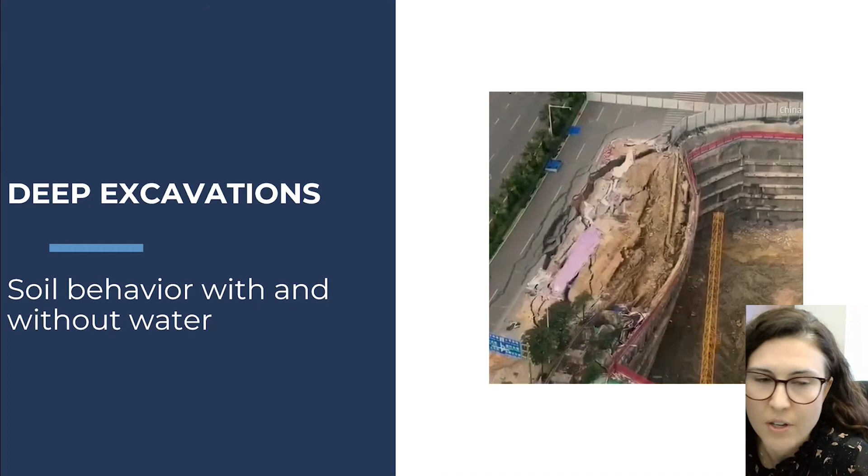It could be dealing with a slope stability problem, where we determine where the loose material is. This could be waste material that is retaining, or any kind of other slope stability problem that's not a natural slope, which could also be governed by some soft material.

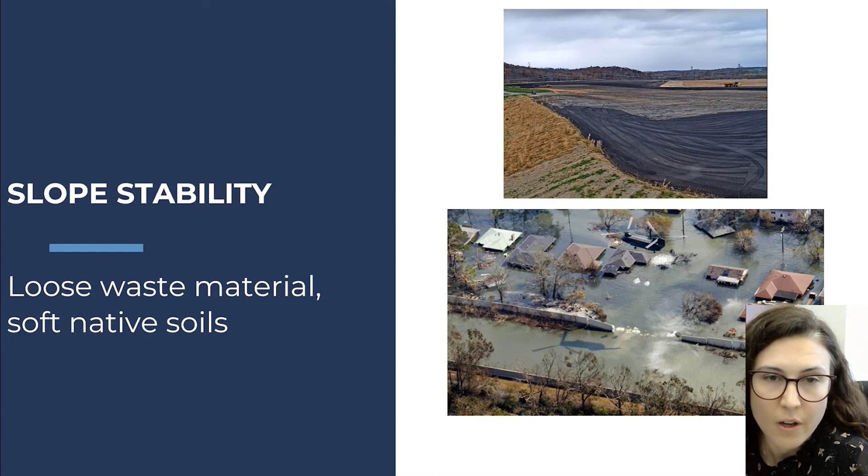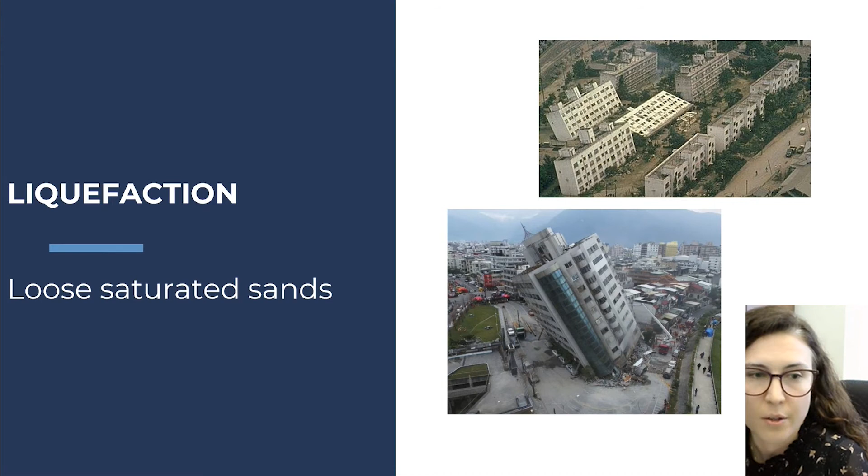We could be dealing with a liquefaction problem during earthquakes, where loose saturated sands - not only sands, I should say sand-like soils, so silts or any kind of waste material that are non-plastic - are susceptible to liquefaction. So we could be dealing with materials like that as well, trying to solve liquefaction problems.

With that introduction, I want to outline what I'm going to talk about today. I'll give a brief introduction on what I think are key considerations in preparing subsurface investigation - we won't cover all fields - and I'll touch on some field investigations, not all, and some laboratory investigation, and mostly the site characterization combining these two, what to look for, and some examples from case studies. We'll finish up with the key takeaways.

With that, let me give a brief intro about what I think are some key considerations in determining the subsurface characterization planning for a subsurface investigation.

Of course, the goal of the project - like we touched on in the beginning - what's the problem? Are you assessing a situation, or are you designing for a certain project with unique loading conditions or unique materials? You know unique materials exist as part of your project. Your project goal is most important, because are we doing a seismic assessment, a static assessment - that will all play into the project goal.

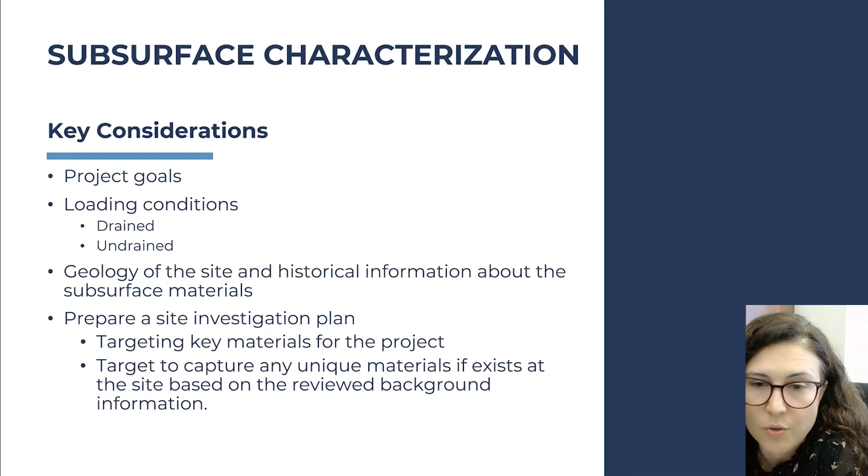With that, you prepare your investigation targeting these materials, which I call key materials for that particular project. And if you want to capture a unique behavior - if you think a unique material is going to govern the assessment - then you target those to be sampled and interpreted.

Let's start with some of the field investigations that could come into play here. I'm not going to touch on every single lab or field investigation, but I've highlighted some that I'll include in this presentation: drilling and sampling, as we typically do, and standard penetration tests. I'll touch these two together, since drilling and the standard penetration test go hand in hand. Then cone penetration tests, which are more widespread these days because of their value in interpreting soil behaviors, and some geophysical tests that give us stiffness parameters for the materials, which can be crucial if you're dealing with a seismic assessment. The purpose of all this investigation, field and lab, is to understand how these soils behave and assign the right engineering parameters for your assessments, designs, or numerical modeling, and any tool you'll use to further understand the soil's behavior.

I'll keep this part brief, just setting the stage for later examples. What I'll talk about here is what the standard penetration test is. It's one of the most widely used field tests we have. Using a standard hammer, dropping it from a standard height, we look at the penetration and collect the number of blows for a certain depth. You're seeing a sketch here, prepared by Paul Mayne, showing how the drop and penetration is measured. This is typically shown in meters, but what we record is penetration in 6-inch increments, typically to 18 inches, and can go up to 24 inches depending on the project.

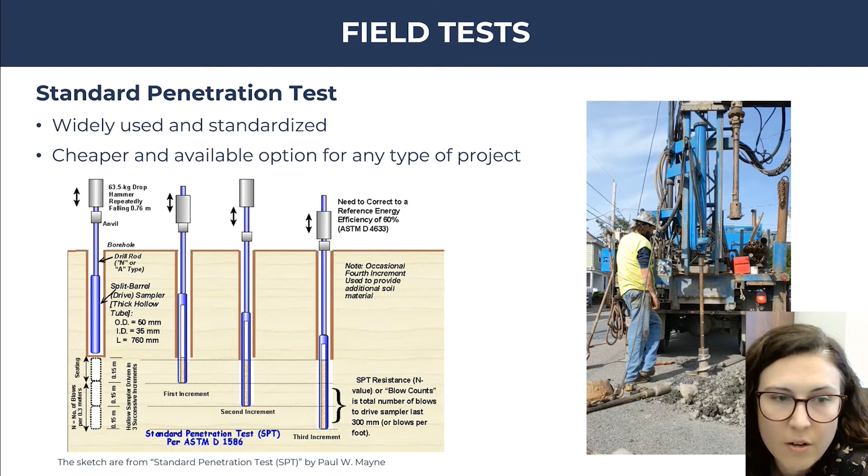We have the chance of sampling it, and also getting an understanding of its density through the number of blow counts. The SPT N values are what the number of blow counts are called. But what's very key to the standard penetration test is the calibration of the hammer, which needs to be standardized, and the energy transfer ratio, which is one of the most important corrections for this field data. It needs to be done properly, because it has a real impact on the number of blow counts collected.

This energy transfer ratio should be maintained and obtained on each rig at least once every 12 months. This is one of the most important aspects of SPT blow counts, which will later be used to interpret many soil parameters. One drawback of SPT is that you need enough distance between the two blow count collections, which can cause interruptions and lead to missing strata information. But at the end of the day, SPT N values are typically used, collected in a boring log, and usually give you a good starting understanding of what you're dealing with.

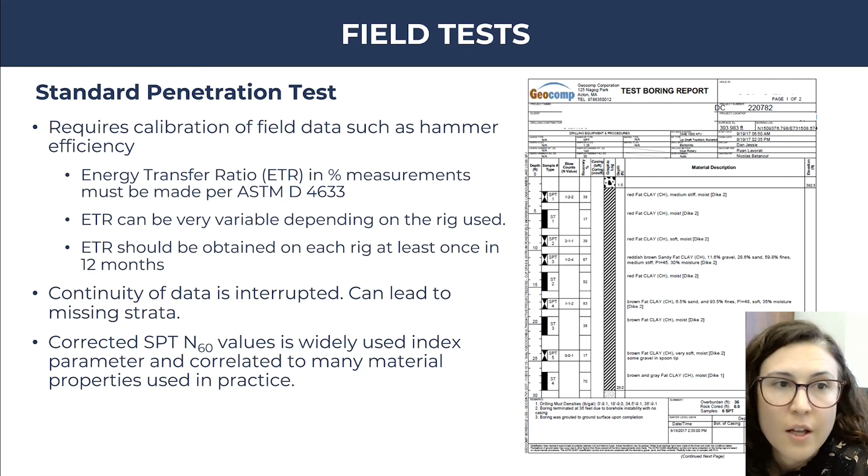Drilling activities also give you the opportunity to do sampling. Split spoon sampling is most widely used to get disturbed material, but it allows you to get the material visually and classify it. You're seeing a split spoon with some bottom ash material here on the left.

You can also use thin-walled samples, which are attempting to get so-called undisturbed samples, but relatively minimally disturbed samples, where you can use Shelby tubes or a piston sampler, which one of them you're seeing on the right here. These help you to collect the critical materials that you're trying to characterize.

Having a borehole, you can use the opportunity to install instruments to understand the water behavior, and you can also install other instruments if your project calls for it, and if you think the monitoring is crucial to your project.

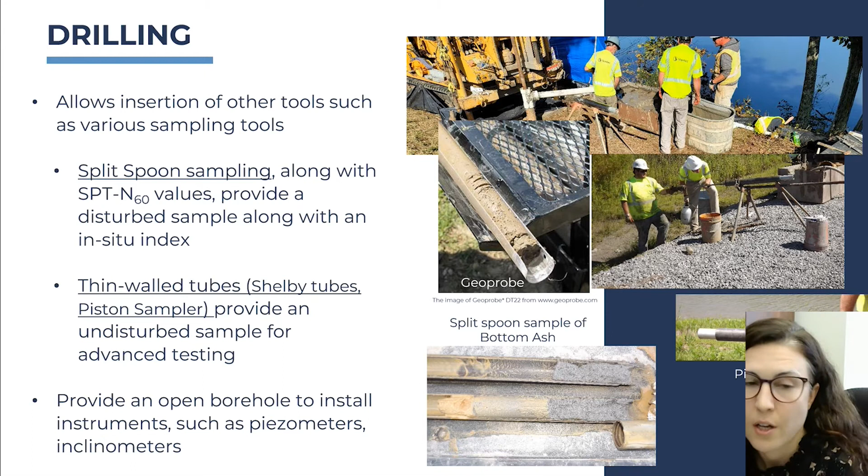With that, I'm just going to touch on cone penetration test, where cone penetration test has been much more widely used recently, more widespread than before, because it's relatively fast and provides good quality data as a profile. So it's more of a continuous profile of data, which is different than the SPT data.

You can add modules to this testing. Typically what it does is with the tip resistance and the sleeve resistance, you have an understanding of the behavior - that's very typical to a cone. But you can also add pore pressure measurements, and you can also add shear wave velocity measurements, where you can understand the stiffness properties or the density of your material, which could be very important depending on the project needs.

But I find the most important value of this testing is the continuous data, which tells you about the variability within certain soil layers.

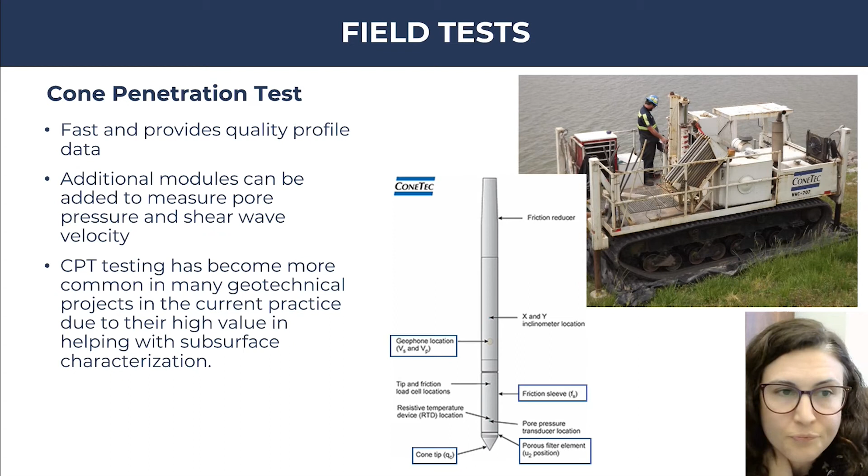Yes, the CPT push rate matters. You could use the standard rate, or depending on the material type that you're dealing with or the loading conditions that you want to create, you can choose to do a different rate, but it gives an idea about how permeable the layers are, how it's going to behave, if pore pressures are going to build up, and what type of pore pressure behavior is dominating.

You can also measure the shear wave velocity, like here on the right. This draft CPT data is available with vendors these days - you can quickly get this draft data at the field, and it could be very beneficial to take a quick look at it to get a general idea of the delineation between the soil layers.

That's why, which I'll tie in a few slides, doing a companion CPT with a boring can be very helpful. If you're trying to make an efficient number of borings and number of CPTs for your project, you can use the benefit of the draft data to plan your sampling and your split spoon and SPT work. I'll touch on this in a few slides down with the value of the combination of the two tests.

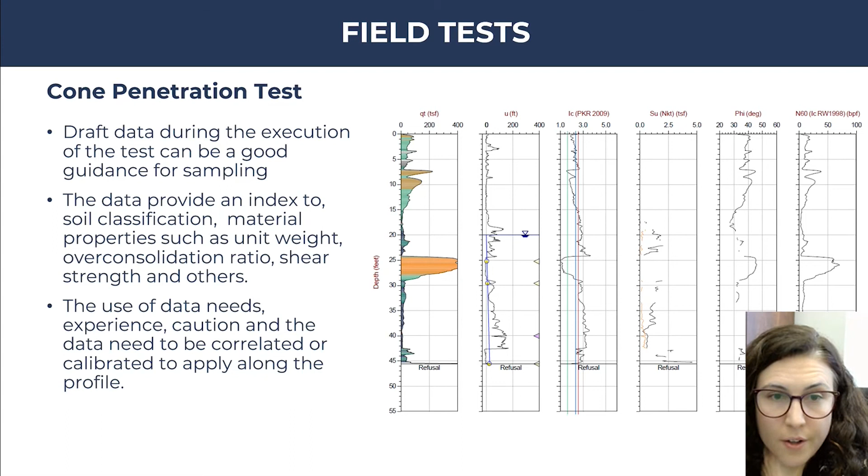Some geophysical tests I want to touch on: shear wave velocity measurements, seismic wave measurements are important. They give an understanding of, especially in the area of liquefaction, or if you're dealing with a seismic assessment where you need the site response. The small strain shear modulus, if it's part of the material properties that you're looking for, measuring shear wave velocity is key. Not only that, it can also help with the delineation of some of these soft layers that you're looking for.

There are many ways of doing it these days, with two major differences: one is active seismic, and the other is passive seismic. Active seismic is more common, most widely known as MASW, cross-hole seismic, or downhole seismic, where you can measure the shear wave velocity.

And passive seismic, mostly this is more of a newer technology where you can use the ambient vibrations to calculate these differences in shear wave velocity. The benefit of that is it has the luxury of giving you a 2D scan.

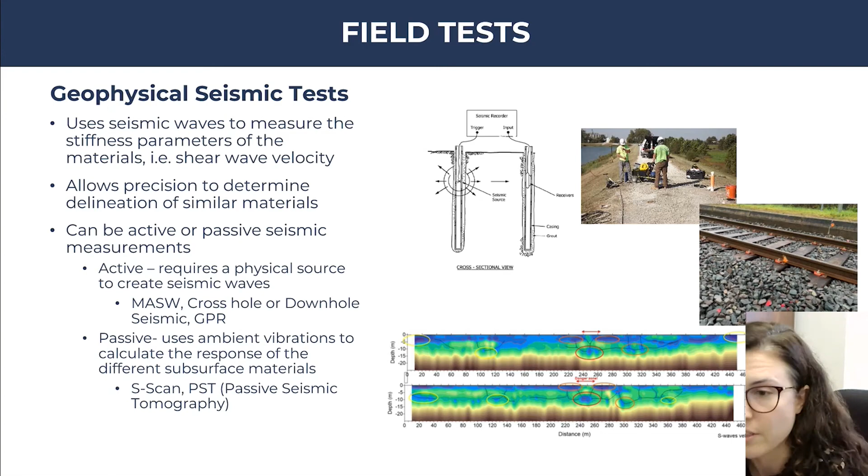So one of the examples of a good practice is with drilling. As we all know, SPT N values are very widely used and correlated to many parameters that we use in our models and in our practice. So the drilling activity can have some impact on the collected data.

And we already talked about the hammer efficiency, that could really affect - not knowing the true efficiency of your hammer and not correcting for that properly can have a big impact on the SPT blow counts that are collected. Not only that, I also want to touch here on the drilling techniques quickly.

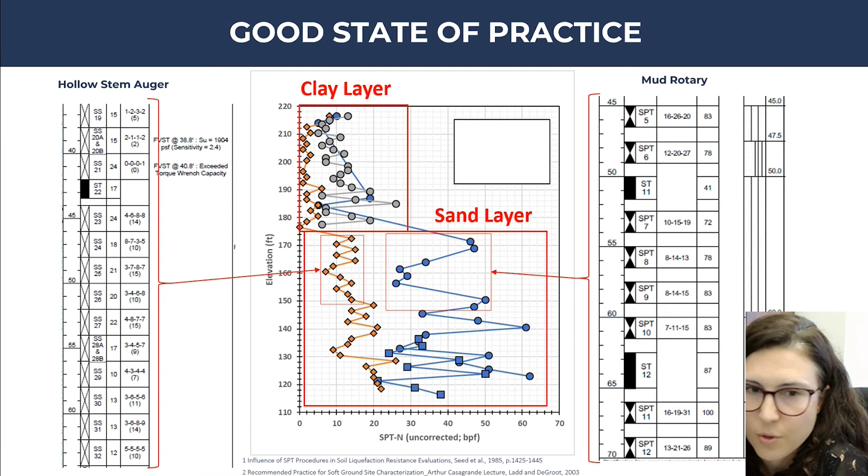So that's one striking example that I wanted to share, which could be in your control, that you can request when you're planning for your subsurface investigation. The other one that I touched a little bit earlier is doing a companion CPT and SPT tests and drilling.

This is a good one because, as I said, SPT and drilling give you the chance of collecting materials and collecting more data. But CPT is a good indicator of what you're dealing with in terms of changing layers, and the pore pressure behavior can tell you about where you can really sample materials, because most of the materials that are good for sampling will have a different pore pressure response.

And if you go and do your drilling right next to your CPT, which is a good practice to do, then you will have a chance of programming your drilling activities where you want to do the SPT test and where you want to do the tube sampling.

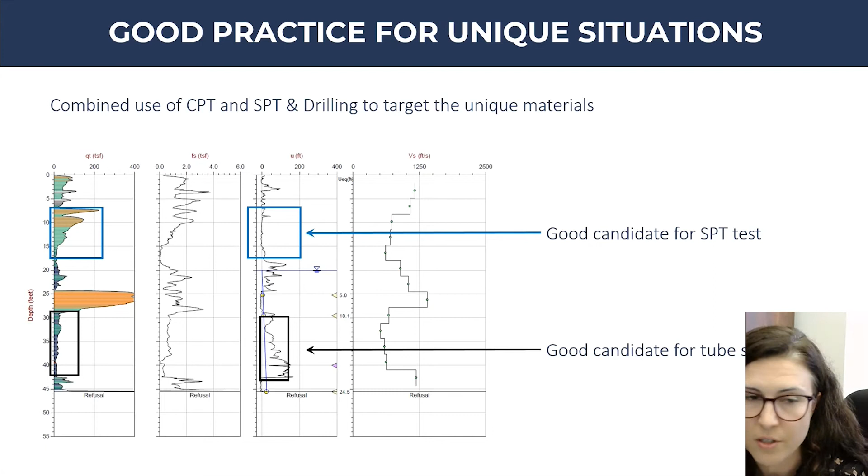At the end of the day, when you're down to really coming up with parameters, you have more information and more kind of information to compare against to get a better picture of the materials. Again, I'm not going to talk about every single lab testing, but I just want to touch on the ones that I typically use.

I kind of separated them into four headings, calling them classification, where I mean most of the classification tests that are typically done as part of geotechnical projects if lab testing is involved. I'm going to touch on these quickly. I want to really stress the importance of X-rays of the tube samples, which can help you select your testing for preparing for material properties.

Consolidation testing is very important too. Again, it's not only for settlement type analysis, though that's kind of the go-to use. Understanding the maximum past pressure of a material, understanding the stress history of a material, can be very important.

And strength testing is very widely done. We do direct shear or triaxial testing for friction angles, and direct simple shear and cyclic simple shear. So I'm going to quickly give an example of these. I'll be brief, and then I'll do some good practice examples in the following slides.

And then the final one, before I forget, is stiffness, I call it, but it's basically modulus and damping by resonant column. I know not every project has this—it's kind of an advanced test and hard to interpret. But if the project calls for it, like if you have a seismic assessment looking for amplification of a site, especially amplification of a slope, where your earth retaining material is the structure, that could be very important. So depending on the project, the need for these advanced tests is valid, and their value cannot be overstated.

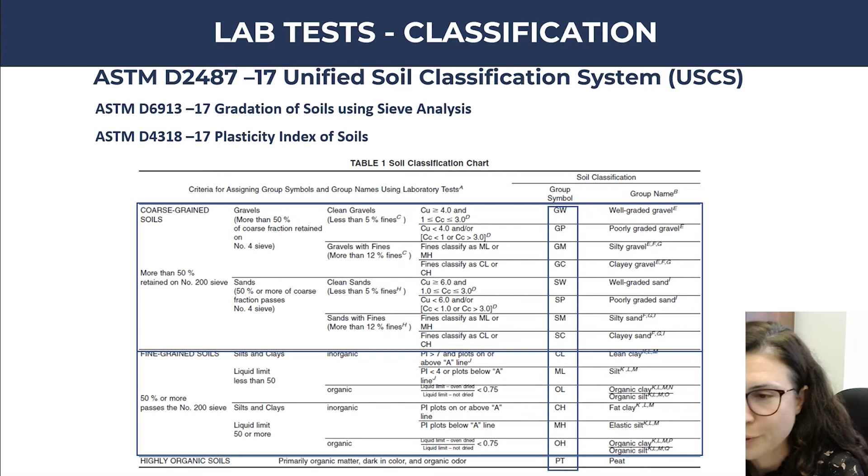All right, I want to stress not only the USCS, the typical classification—I wanted to mention specific gravity, especially if you're dealing with unique materials, like waste materials, mine tailings, or coal ash. They have a very different specific gravity than typical soils. Typical soils are 2.6 to 2.7, but these materials can be different—as low as 2, or high—depending on their chemical and mineral content.

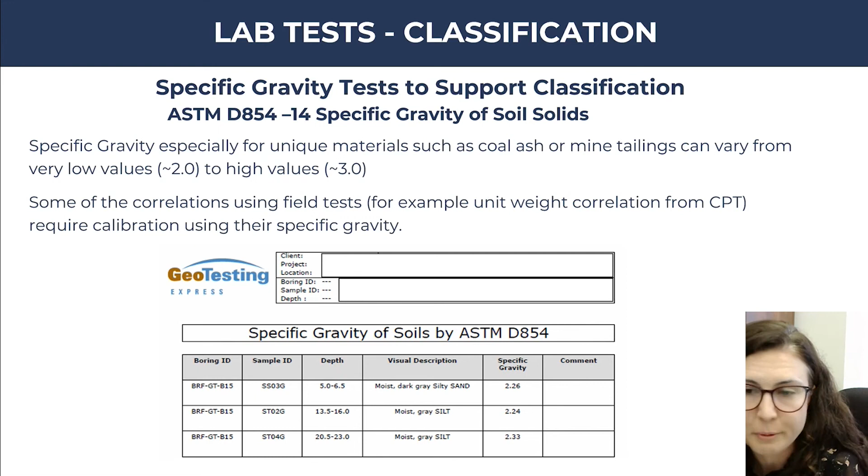Now, last but not least, for sure, is the X-rays of the tube samples that you're collecting. It is important, and if you're dealing with sensitive materials, and if you know that sample disturbance is always there, and if you're going to rely on your lab testing, it's very important to really know what the tubes are.

Sample disturbance has a lot of different tiers to it. Sampling, basically mud rotary, was one of them—making sure the drilling mud is on top, making sure the drilling mud density is controlled so that you collect good samples. That's the first step, but you have to transport them properly, then extrude them properly, and then you have the stress changes.

So there's multiple tiers to this, and controlling some of these tiers can lead to good lab data that you can work with—at least if you want to believe in the lab data. This is important.

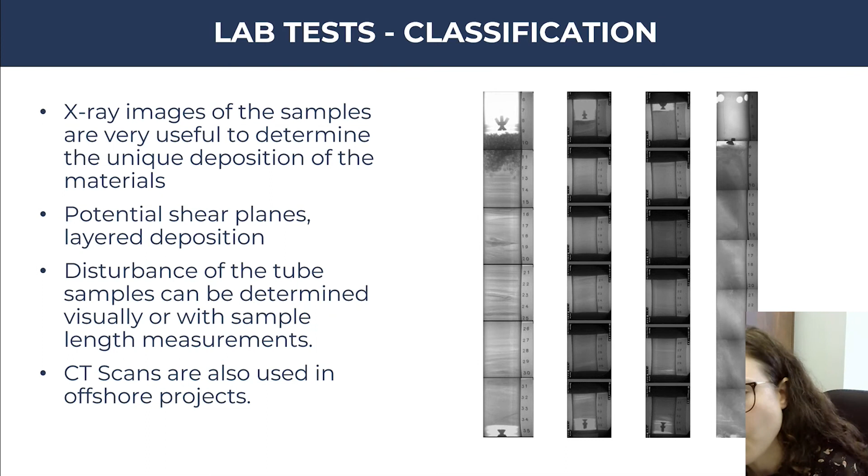Also, you can use the benefit of these measurements on the right to know that in the field you have a certain measurement of the tube, and in the X-ray you have a certain measurement of the tube. You can compare the two to see if transportation has affected the materials. Also, you can check for boundary effects—if the tube was hard to push, you could see the bent tubes in X-rays, and you don't want to use those in your lab testing.

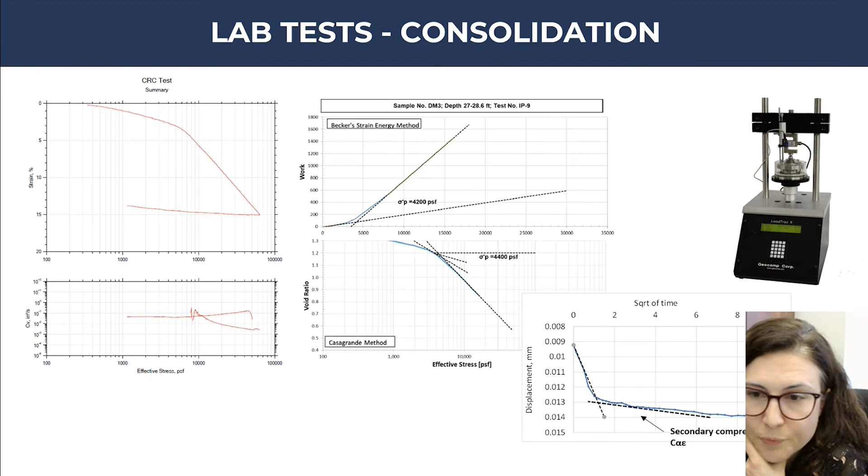Again, planning for these tests is important, based on what your goals are.

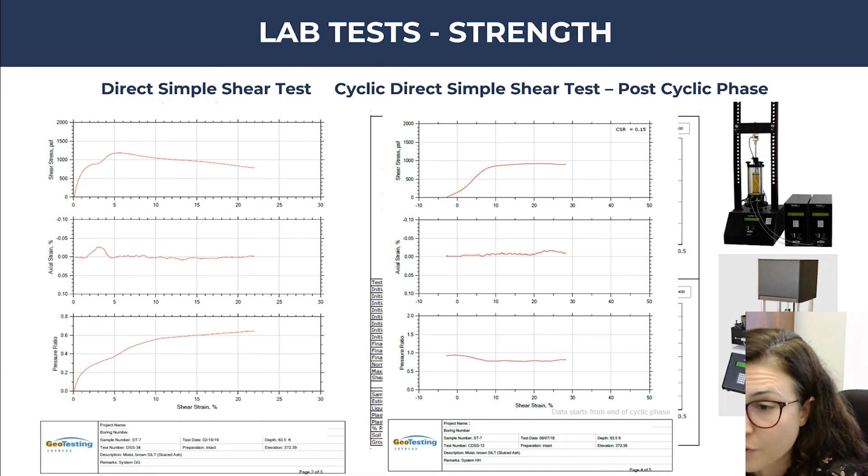I want to touch on the cyclic direct simple shear test, which is a post-cyclic phase. It looks exactly like the output of a direct simple shear test, but it's done after earthquake cycling, simulating earthquake shaking with certain parameters applied. What I want to highlight is the benefit of doing companion testing on the same tube, ideally, to understand the percent reduction in strength, because that's usually how we work with it—it's one of the areas where it's hard to get the strength after the earthquake happens, so that's something I want to stress.

Resonant column testing is another one, where you can determine shear modulus and damping curves, and shear wave velocity testing. This is an advanced test that I don't want to touch on too much in detail.

Some characterization examples that I wanted to show—I guess you got the message I'm trying to give here: it's the combination of field and laboratory testing, good planning, and making adjustments to your plans as you get more information, using the draft information to get all your data lined up for parameter development and interpretation of the data.

One thing I wanted to show is the stress history, like the consolidation tests we talked about, where we determine the over-consolidation ratio—the maximum past pressure over the in-situ stress. This stress history is an important metric that helps you understand how your material is going to behave, and it can also help indicate whether your sample quality is good or not.

Here I'm showing an example from one of the sites I worked on, which I picked because the consolidation test is not very typical to run on sands, but in this particular example we were dealing with a silty sand material. It classified as sand-like because there were a lot of non-plastic locations, but the PI was variable and it was plastic enough for us to sample. We wanted to use the consolidation test to understand if our data would make sense with the strength testing—it turned out to be good, so I wanted to put this one out there.

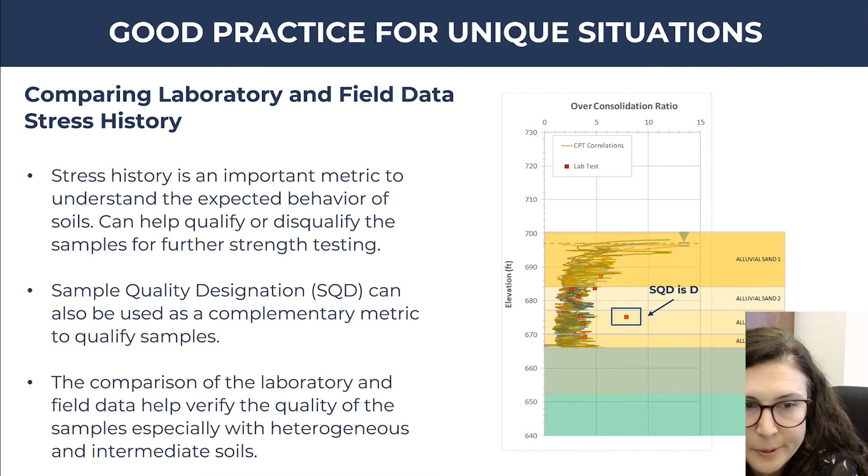Consolidation tests can give you an idea of what to look for in the strength tests, and can be important for making sure your strength tests are reliable. That's one example I wanted to show, which can help with understanding and managing heterogeneity as well. The other example is comparing the field and the lab.

Laboratory measurements with shear wave velocity are tricky. Sometimes you get good correlations, sometimes you don't. It's really not an easy process, but if you have good sources, if you have in-house people who can interpret the data, you can use that to compare, and you can make assessments that these samples are relatively representative of the field.

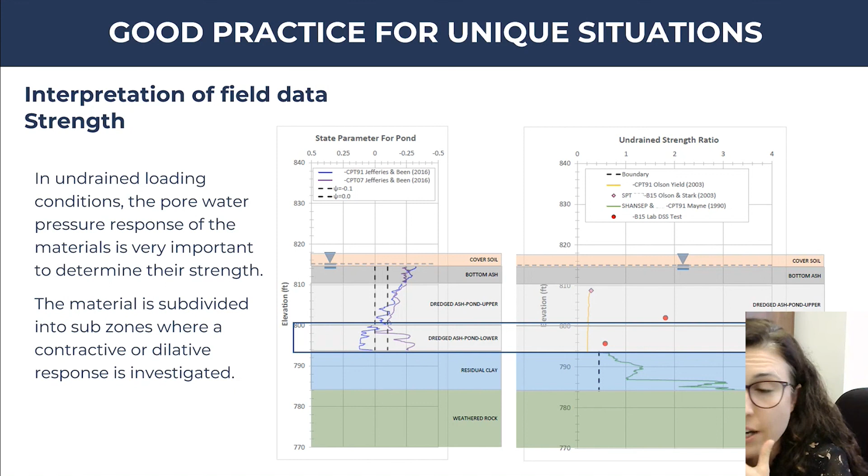So I just want to stress here, if you don't process this and get an understanding of how the profile looks, you may want to be only assigning this test, thinking the middle of the layer is going to represent the whole, and it may not be. So that's one of those examples, just to show as an example.

And one more data point here is to complement strength. What we're doing is charting the undrained strength ratio to the CPT resistance, and this is CPT correlated undrained strength based on case histories where slope failures happened, Olson's relationship, so to speak, from Olson and Stark in 2003. That's what you're seeing in light gray.

We charted our data from all the coal ash that we have, and you're seeing the variability, which speaks to the variability of the ash. You would be thinking, these wide ranges of data, what do I do with this? But it was kind of eye-opening to see that the lab data, to a certain extent, agrees with the interpretations, even though they're two separate independent ways of looking at it, and it speaks to the variability of the material.

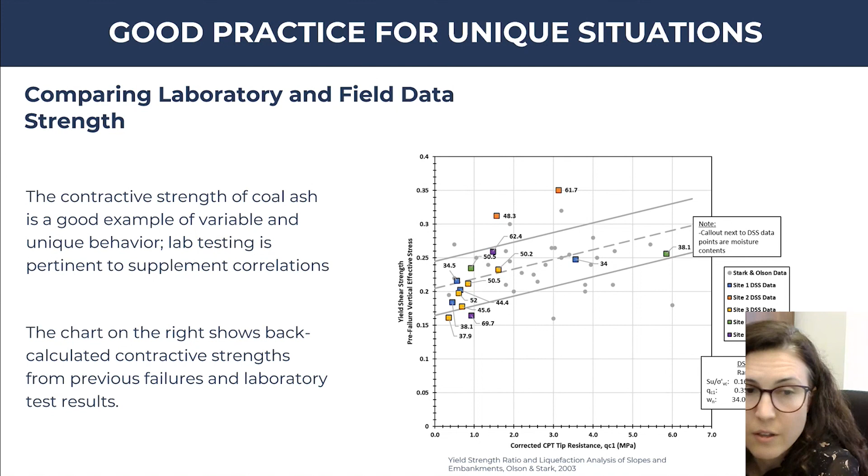But it also gives an understanding of these undrained behaviors better than not knowing more, but just assuming things. So this was good - we just need more data, of course. We need to get a better understanding of whether it's really correlating to the water contents, which are called out here. But long story short, I guess I wanted to say the relationships out there, if used properly with some knowledge and experience, do a good job estimating some strengths.

Another example to touch on a unique situation, if you have a seismic stability problem, what I wanted to stress here is the monotonic response, the cyclic response, and the post-cyclic response.

This was a good set of tests that, if you have the luxury of doing it, is very valuable to get an understanding of the percent reduction in strength, and very exactly which shear strains they are really acting on. The benefit here is to do these on the same tubes, on a good tube, where you use the X-rays to really pick and choose where you do your tests.

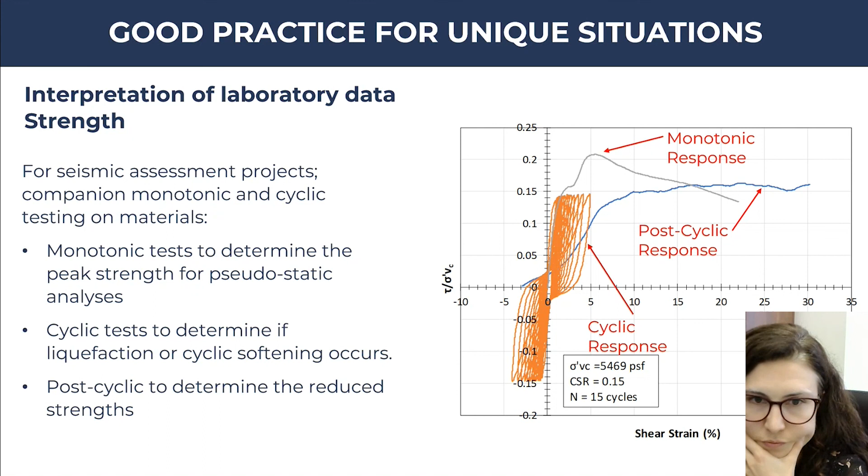But that could be really beneficial to get a good understanding of the material. To touch on the stiffnesses, for unique materials like ash, what you're seeing on the left is a typical chart as an input to a site response analysis. This is the shear modulus reduction chart. Here you see the normalized shear modulus and then shear strain, where this is a key input to an amplification analysis, and you see the band and range of materials, even though these are all ash materials.

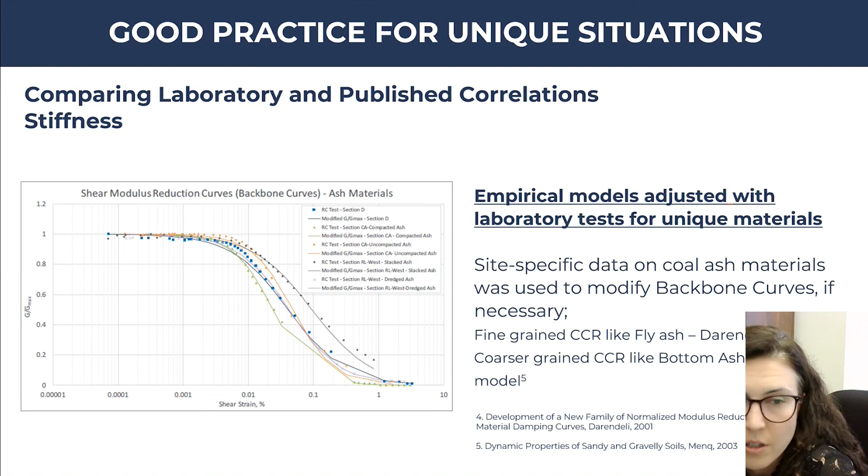So there are good relationships out there that are part of the numerical modeling. But what's important, I guess, at the end of the day, is the input to your modeling. If you're dealing with unique materials, you can use the benefit of lab testing to calibrate. The dashed lines, the straight lines, are calibrated to the lab data to be entered into an amplification model.

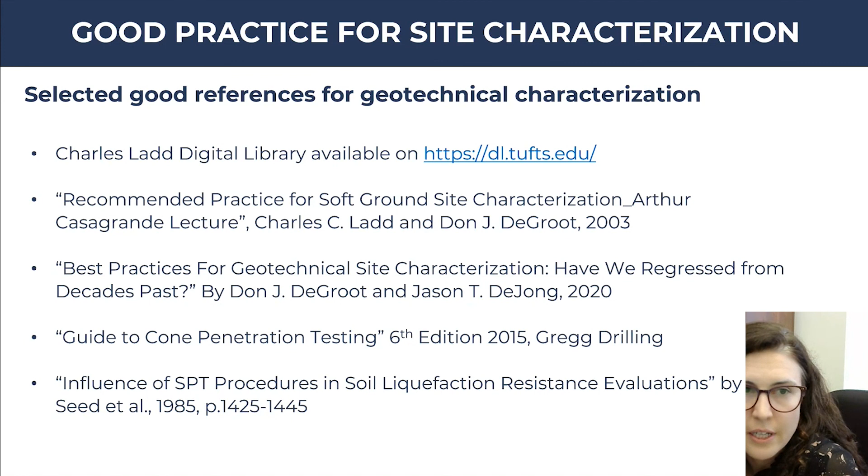Here are some good references that I really think are very valuable. I'm going to skip to that quickly and just mention very briefly some of the case histories. I know I'm running a little late over the time, but let me just go through two quick cases and then we'll take some questions.

One of the cases is a slope stability case, where we looked at the seismic stability of a coal ash storage unit. But what I want to point out is kind of what I talked about all hour today. Here is a stack where you see the upper portion of the stack and the lower portion of the stack.

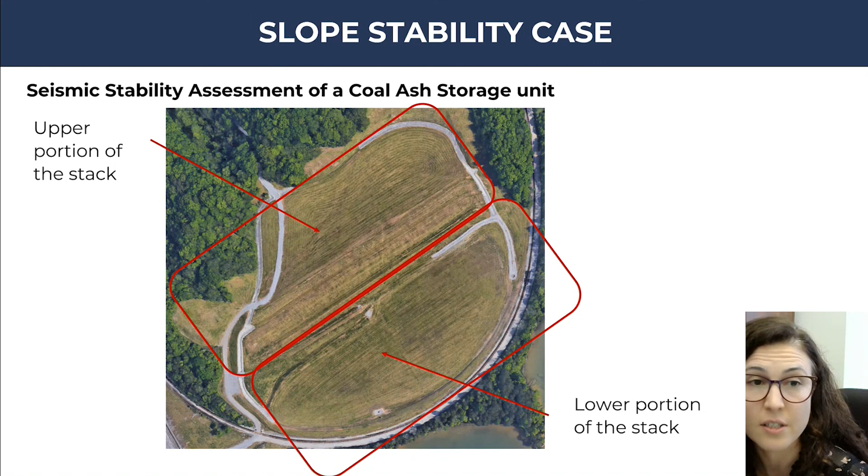I just want to give you an idea about where we're talking about. This is a coal ash stack. Here is the upper portion, and here is the dike that entails that, and then here is the lower portion in pink, and there is a lower dike here, which we would call the upper dike, and this is the lower dike. This is a representative historical cross-section. Before we went in there and analyzed it, we looked at the historical information and thought there is residual clay under the dike, which would be our assumption and starting point.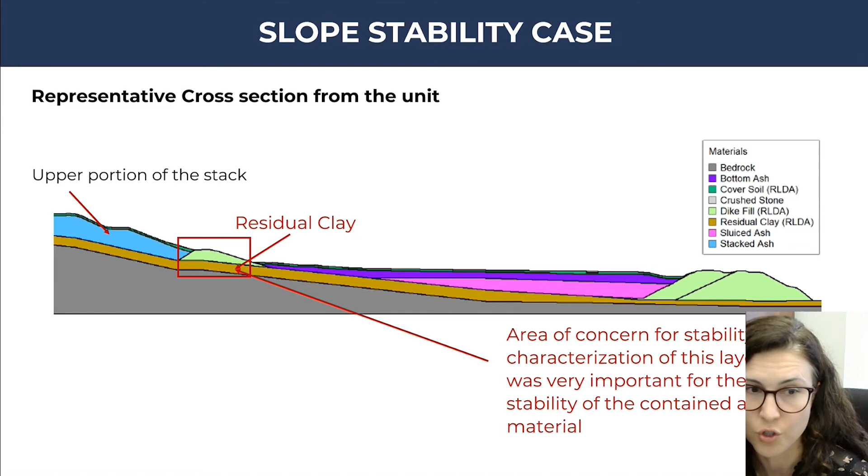But when we looked at the same plan view, again you're seeing this part is the upper portion of the stack, here is the lower portion of the stack. When we overlay the historical information, more like very old drawings, we see a valley of ash that could be potentially under the dike. Since this is a seismic assessment and liquefaction is important, that's when we thought, okay, this is an important thing to figure out, and we tailored the subsurface investigation based on that to see if there really is ash under the dike and how deep it is.

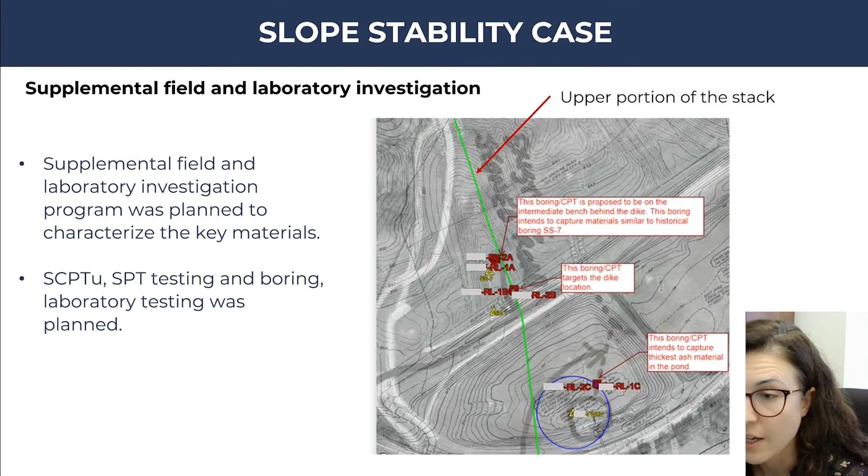First we start with a CPT, as I said, that's kind of our good practice of doing it, and we got a good CPT. The CPT confirms where the dike is, pretty much where we expected it to be. But then we saw this low strength underlying material.

But CPT cannot really answer the question directly, so we wanted to understand this, because it could be clay with a soft clay lower strength, since pore pressure behavior is high and resistance is low. So we confirmed at least where we want to sample, and we got the same lower blow counts. In our companion boring, knowing this is a lower strength material, we chose to get tube samples as much as we can so we can test this material, understand its behavior, and do some classification testing on it.

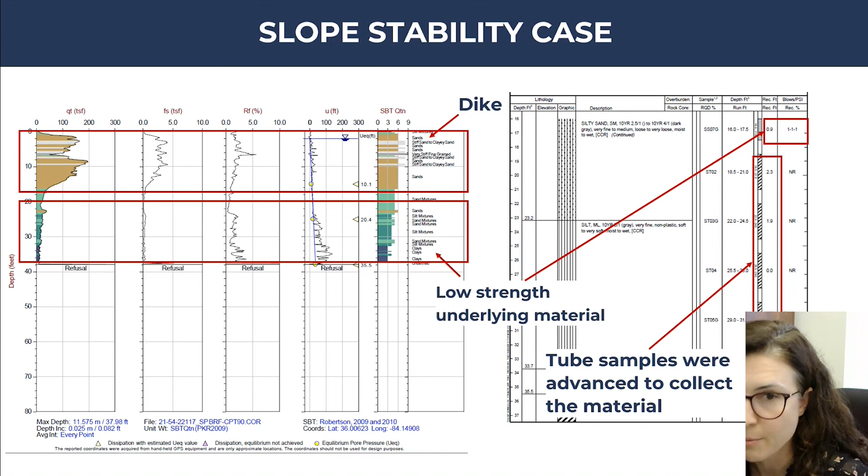So the tube samples were collected, and lab testing was conducted, like we talked about: USCS classification test, confirming that this is not a plastic material. It was visually confirmed to be an ash material, and that needed to be looked at for undrained behavior because it was under the water, and we needed to understand how it was going to behave.

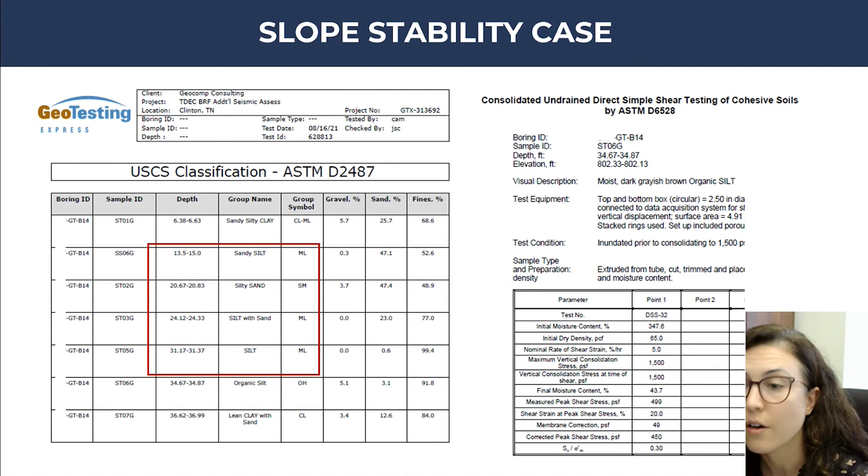We conducted a direct simple shear test to determine its potential undrained strength, and you see a summary result on the right, which ended up being a truly undrained behavior. So we updated our models. Instead of being a clay, it is an ash material, and this totally changed things. This could really be affecting the stability of the stack. That is the concern here.

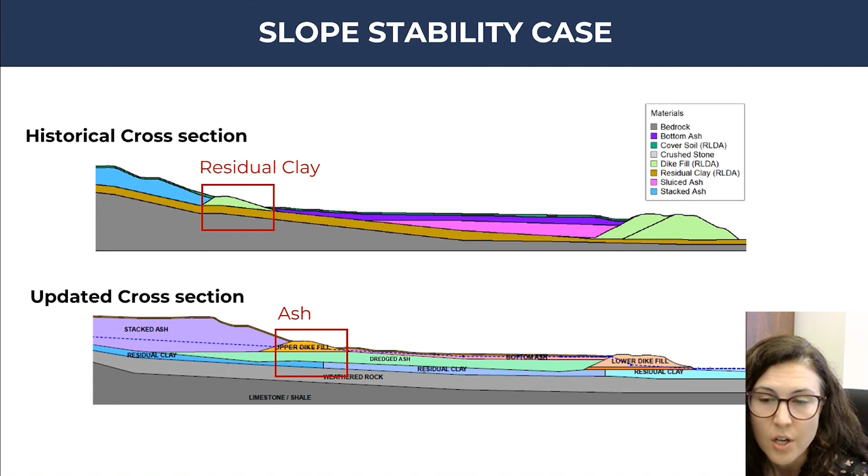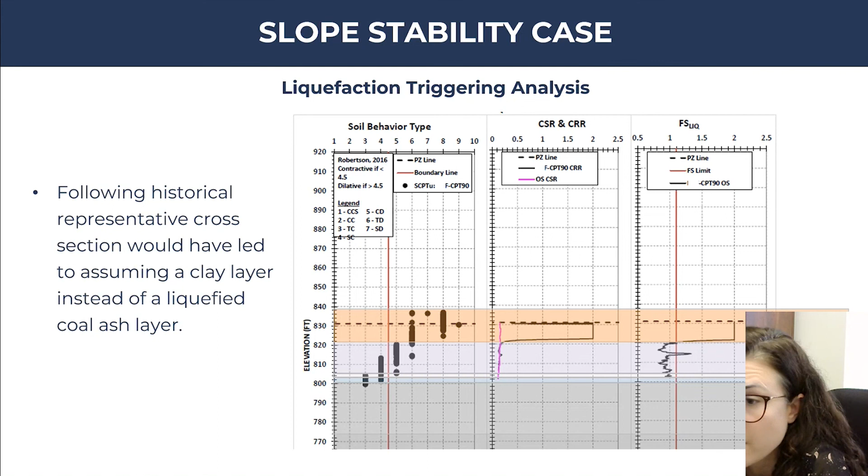Not only is it a different strength, but since it's a seismic assessment, assuming it's a clay you would kind of disqualify it for liquefaction triggering analysis. So that's the other thing you want to consider. You need to know the goal of the project and the loading conditions you're working against. And definitely this ash was liquefying under the design earthquake. So this was the stability example, and I want to give a quick example for settlement.

This is on the fancy side of the world where you have a finite element model that really models the tower. We're modeling a huge tower, which is putting a lot of stress on the clay, and we want to understand the settlement of this material.

There are two ways to this. You can use your FLAC models, and you have a lot of tools at hand, constitutive models that help you understand the initial stresses, and then you determine the stresses beneath the tower. You do your analysis and get the stresses beneath the tower where the zone of influence is.

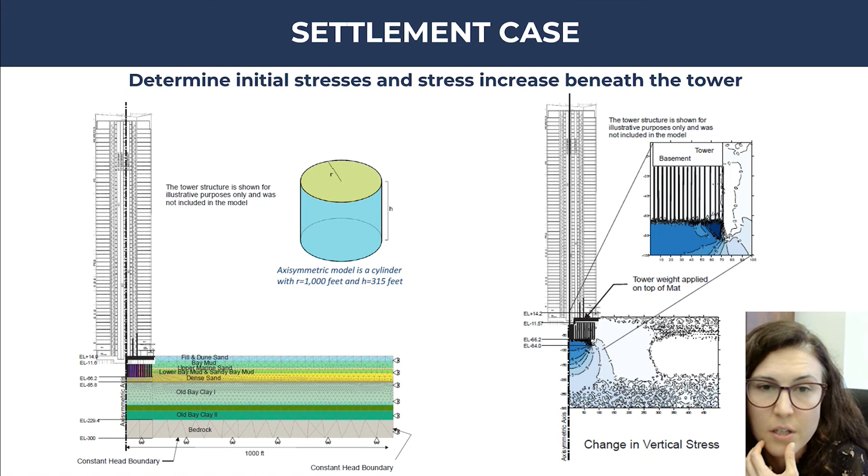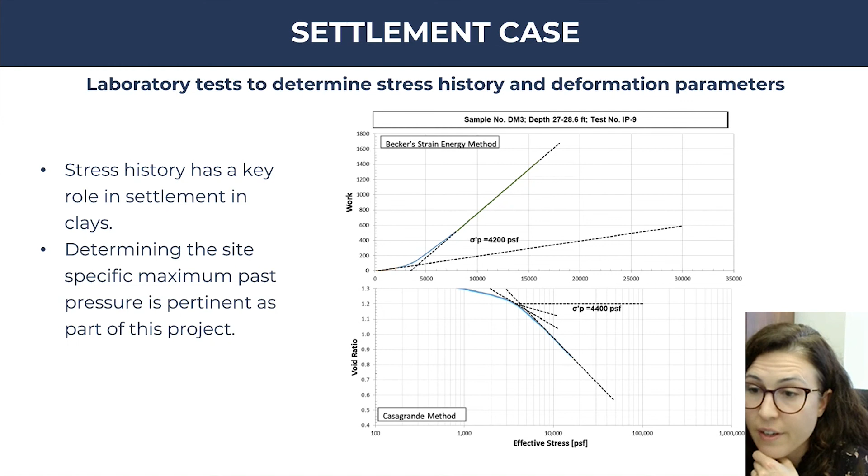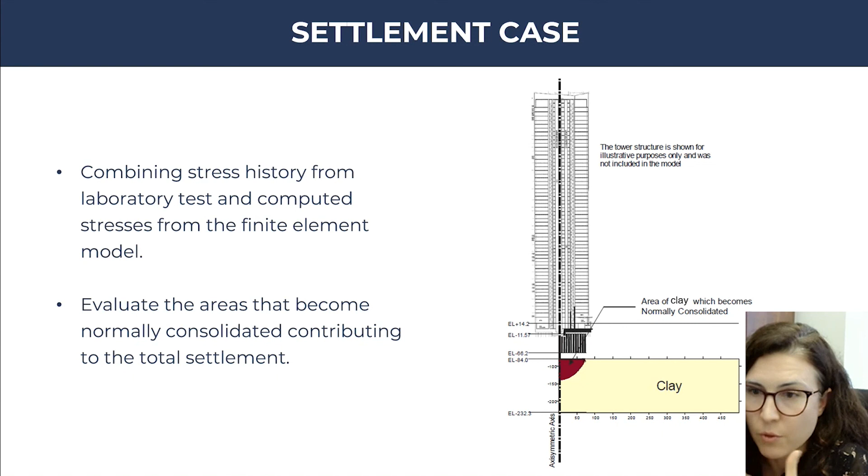Then comes the importance of the lab testing, where, as we all know, this settlement is going to be dependent on whether it's over-consolidated or normally consolidated. You'll have totally different coefficients of consolidation. You really need to determine the past pressure, where consolidation testing becomes very handy. Then you go back to your model and enter that information. This is the iterative process I wanted to stress, the combination of efforts, where the normally consolidated area versus the over-consolidated area affects the settlement calculations.

Not only that, the secondary compression was also very important in this particular example. Knowing the difference in the change in the secondary compression, the C-alpha coefficient, with the effect of being past the past pressure versus being less than the past pressure, it was really striking. As it passed the past pressure, the rate was different, and this needed to be entered into the finite element model in a more unique way, with the constitutive model calibrated to really capture the true behavior of the soil under the loading.

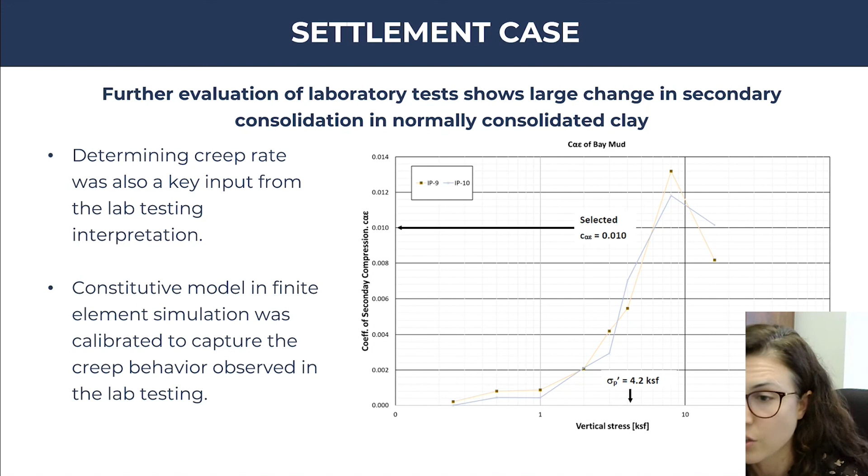So I wanted to put that out there as one of the unique examples you wouldn't think could affect the calculations. So I think with that, I'm sorry for being a little over time, but I guess my key takeaway is, as you can tell, it comes down to this.

We could have all these very fancy tools, finite element models, stability models, stability programs that we use quickly to calculate all these stabilities, but it comes down to the input to these models. The quality of the input parameters to these analyses is going to be key. And if you're dealing with unique materials, heterogeneous materials, you really need to pay attention and do a combined field and laboratory program that requires a lot of thinking up front to save time down the road.

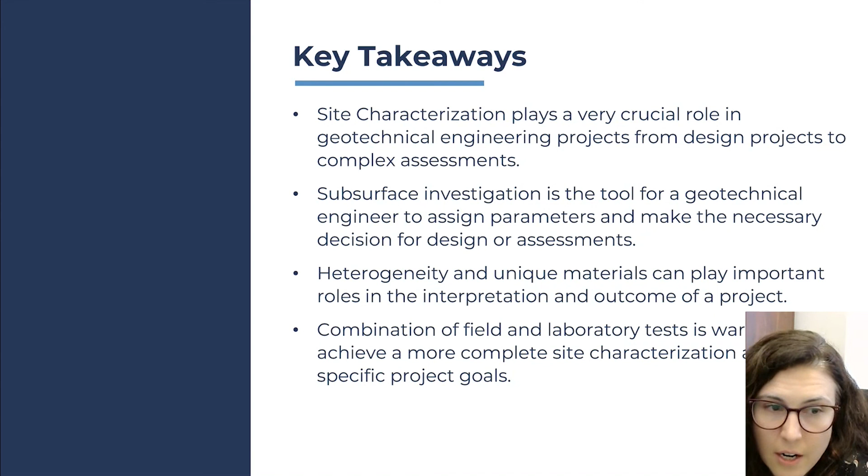And at the end of the project, you're making a lot more educated interpretations of your soil properties. I would like to take questions now, if we have some time.